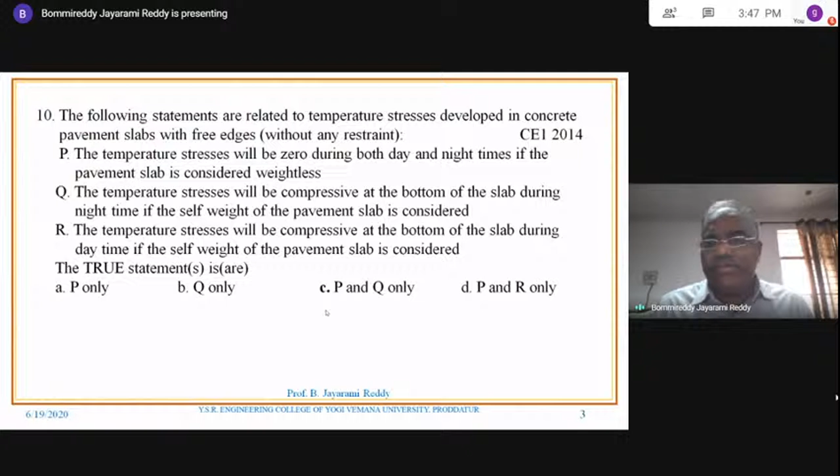Now let us look at the various statements given. The first statement is P: the temperature stresses will be zero during both day and night times if the pavement slab is considered weightless.

So now whether that statement is correct or not, we have to look, because without any restraint the slab is going to move. So there are no warping stresses. Warping stresses come into picture only when there is a restraint. But here restraint is not there, so warping stresses are zero.

So the other stresses are frictional stresses. As seen in the last class discussion, frictional stress means W multiplied by F, weight of the half of the slab multiplied by F, will be equal to stress in the concrete multiplied by area of the concrete. Area of the concrete is B into H. This is the equation that you have seen.

But when the slab is weightless, W equals 0. When there is no weight of the slab considered, there is no frictional resistance. When there is no frictional resistance, then temperature stress is also 0. So the statement P is correct.

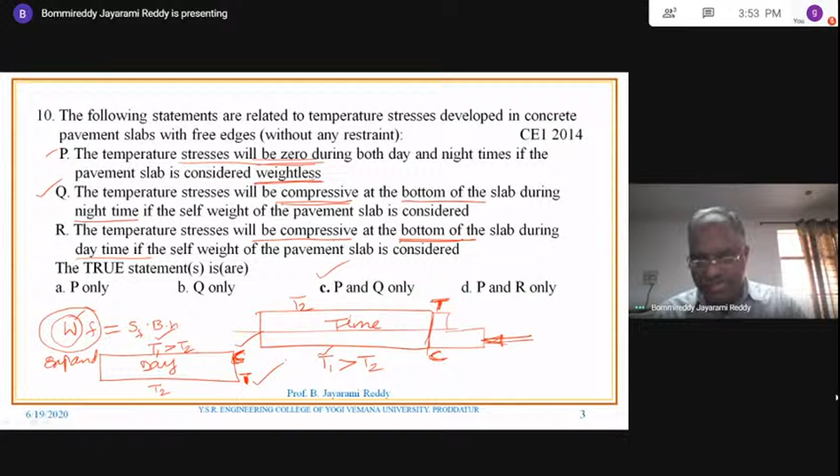Okay, this is the explanation, you can look at it later in detail. The detailed discussion is also given for statement P, statement Q, and also R, which you can see later. So already I told you for P, what is going to happen - warping stresses are zero because there is no restraint. You can look at whatever discussion covers these concepts.

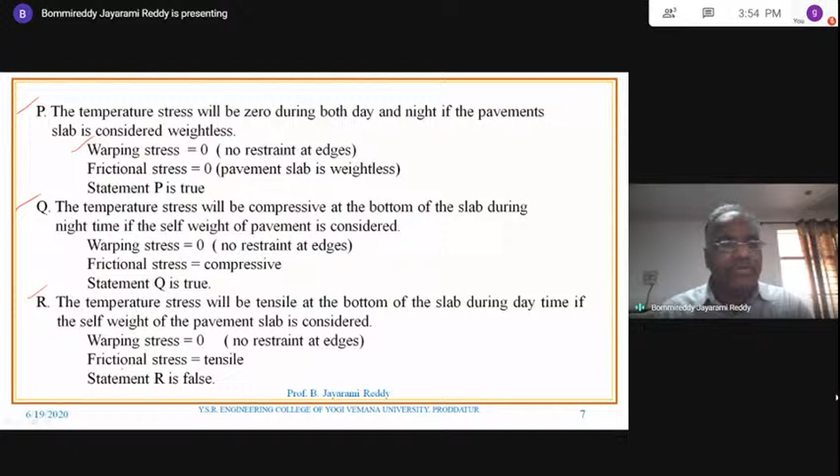The next one: a pavement designer has arrived at a design traffic of 100 million standard axles, so NS equals 100 MSA, for a newly developing national highway, as per IRC 37 guidelines, using the following data: design life 15 years, so N equals 15 years, commercial vehicle count before pavement construction is 4,500, meaning at the time of construction it is 4,500, annual traffic growth rate 8% given. The question asks what is the vehicle damage factor F value?

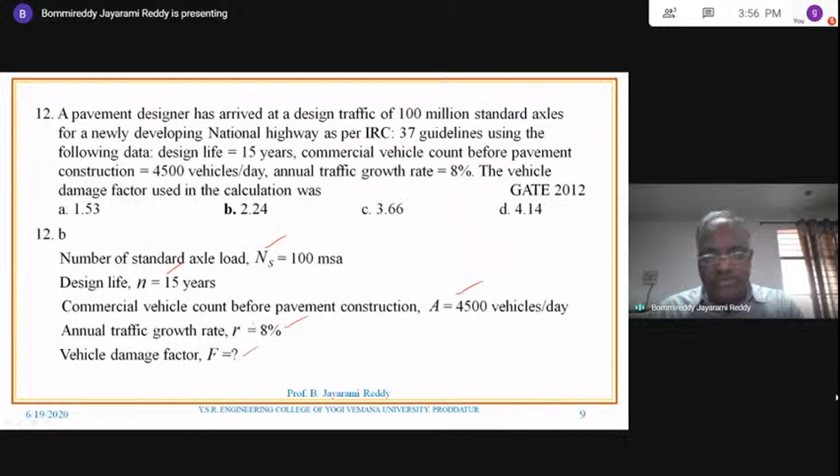Based on this, we have a relation for NS: NS equals 365 times A times ((1+R) to the power N, minus 1), divided by R, into F, also multiplied by D. Lane distribution factor is not given, so consider D as 1. In this, NS is known, A is known, R is known, only F is the unknown value that can be found, which equals 2.24.

While observing and reading all these problems, they may look simple, but if you don't have practice computing the F value, it's very difficult in the examination. You may need to spend a lot of time, or though you know the formula, you may struggle to substitute it correctly - it involves 1 plus 0.08 to the power 15, which is 1.08 to the power 15. If you have knowledge of computing this using a calculator, only then can you solve this problem. Majority of students will fail at this calculation stage too, so practicing to get this solution is more important.

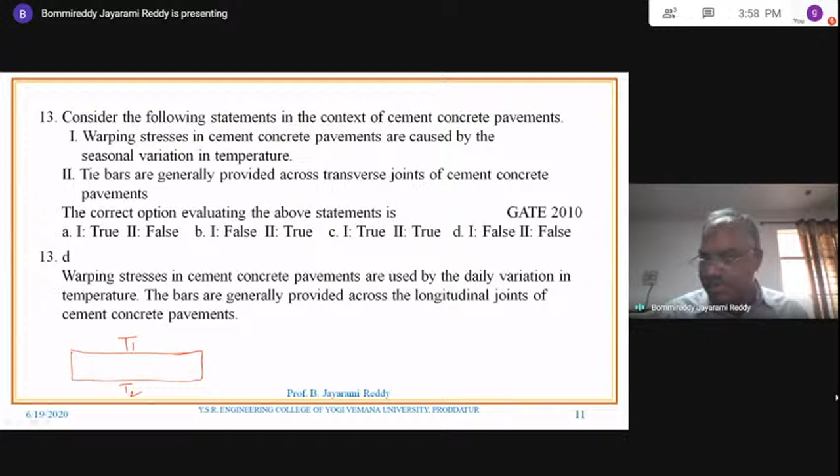Next one: consider the following statements in the context of cement concrete pavements. Warping stresses in cement concrete pavements are caused by the seasonal variation in temperature. How do warping stresses occur? Warping stresses occur because of the variation of temperature from top to bottom, and because of this variation, warping stresses occur. It is not varying seasonally - the warping of the slab occurs only because of the change in temperature across the cross section.

So statement 1 is false. Read it: warping stresses in cement concrete pavements are caused by the daily variation in temperature - daily variation only, and variation across the cross section.

Next, number 2: tie bars are generally provided across transverse joints of cement concrete pavements. Where do you use tie bars? Tie bars are used along the longitudinal joint, not the transverse joint - this is called the tie bar. So the tie bars are used along the longitudinal joint, but not the transverse joint. In the transverse direction, the reinforcement used is called dowel bars. Dowel bars are in the transverse direction, whereas tie bars are in the longitudinal direction.

So statement 2 is also false. The answer is D - statement 1 false, statement 2 also false. For answering all these questions, overall subject conceptual knowledge is more important, not remembering certain simple points.

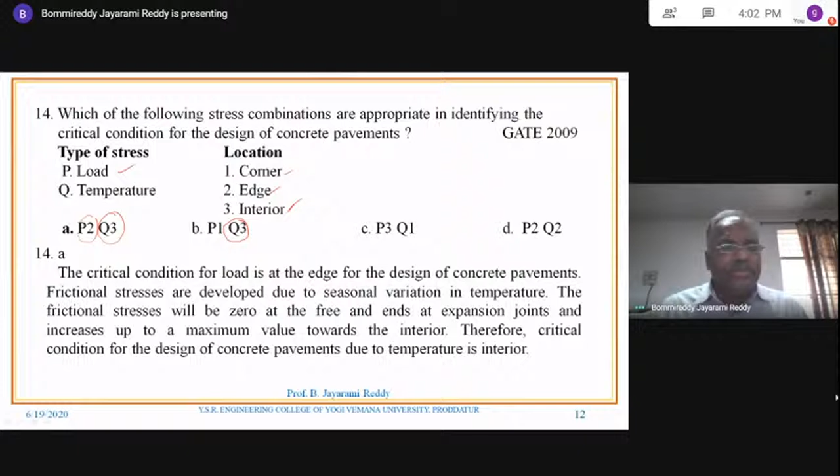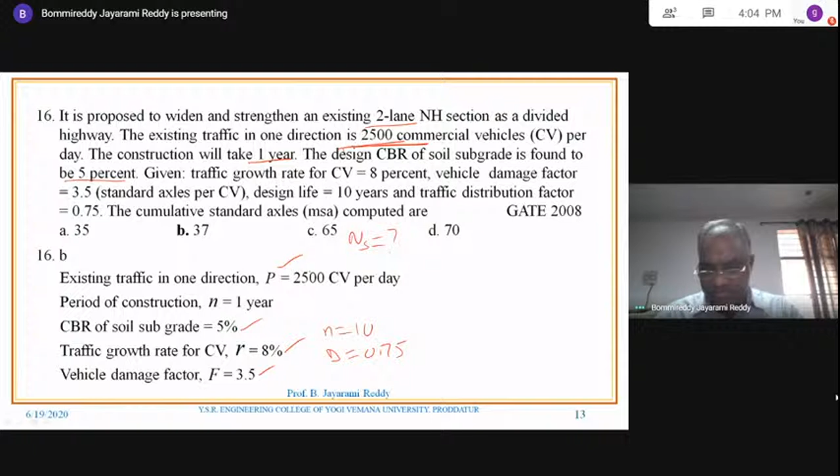The question asks for cumulative standard axles computed, NS. Since it is in only one direction, compute the NS value also in the same direction. So using all this given information, find out the anticipated traffic.

Anticipated traffic after 1 year: A equals P into (1 plus R) to the power 1. Here N value equals 1 year since construction will take 1 year. So accordingly, A equals 2700.

Basing on this, cumulative standard axles NS equals the known formula. Since it is only in one direction, you can omit the factor of 2 which represents both directions. But since the question is given in one direction and asks for cumulative standard axles in one direction, you can either calculate using 2 and later divide by 2, or omit the 2 altogether and the value obtained will be correct directly. Substituting all values accordingly, you will get the answer.

You get 74.94 for both directions. For one direction, take half of it. If you don't use the factor of 2, you get 37.47 directly. Otherwise, use 2 and then find per lane value - it comes to 37.47. This is a standard question; several questions of this type have appeared so far.

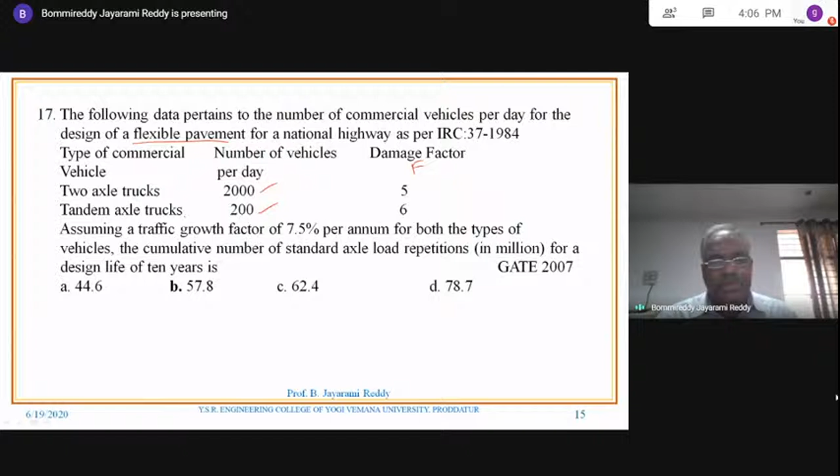The damage factor F and number of vehicles per day are given. 2-axle trucks are 2000 per day, tandem axle trucks are 200 per day. Tandem axles means 2 axles very close together at the rear side of the vehicle - that is called the tandem axle. Assuming traffic growth rate R equals 7.5% per annum for both types of vehicles, for both 2-axle trucks and tandem axle trucks.

The cumulative number of standard axle load repetitions for a design period of 10 years is required, so N is 10 years. What you need to do here is find the NS value: NS1 for 2-axle trucks and NS2 for the tandem axle trucks.

Because damage factor is different, vehicle number is also different, but rate of growth is same and design life is also same. So what you do is find out NS1 separately for 2-axle trucks, NS2 separately for tandem axle trucks, so that the total value becomes the standard number of repetitions for the highway.

So what you do, this is the standard formula that you know, and the lane distribution factor is not given. You can use D equal to 1 multiplied by D.

And this is the entire information. Now, for the first case, A equal to 2000 vehicles and all these parameters are same, and find out NS1, which is 51.6 MSA.

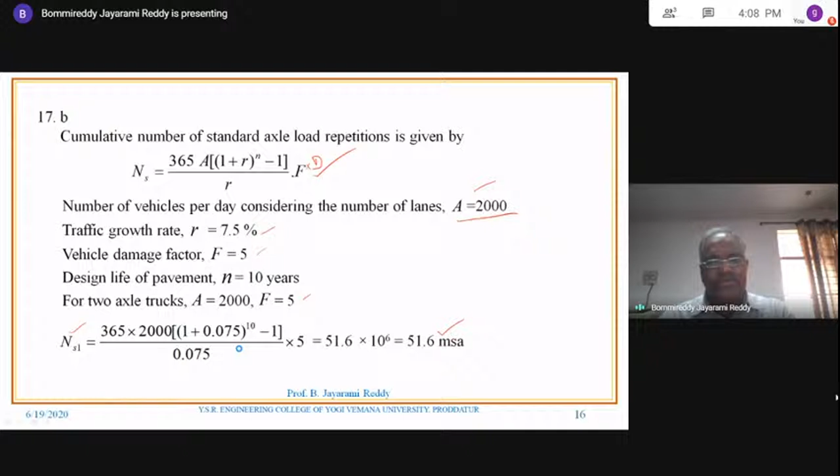200 and damage factor is 6. Accordingly substitute, and it will be 6.2 MSA. So NS1 plus NS2 becomes equal to 57.8.

So here two different types of vehicles are there, two different types of axles. So we are computing the standard axles for axle 1 and also for the axle 2 type of vehicles.

Next one: the width of the expansion joint is 20 mm in a cement concrete pavement. That means that is the gap between the slab panels in cement concrete, the gap between the cement panels. So this is one panel and it is another panel. The gap in between these two becomes equal to 20 millimeters.

The laying temperature is 20 degrees centigrade, so at the time of laying it is 20 degrees. And the maximum temperature in summer is 60. So that means the temperature is varying from T1 to T2.

The coefficient of thermal expansion of the concrete is 10 into 10 power minus 6, alpha is given. And the joint filler compresses up to 50% of the thickness.

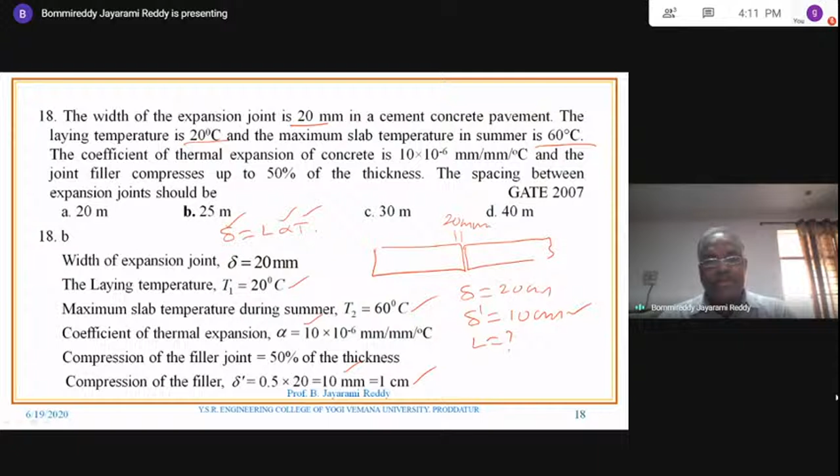And delta is known, alpha is known, temperature difference is known, that is 60 minus 20, and L is the spacing between the expansion joints. You can look at here, L into alpha into T equal to delta.

So delta is 10 mm, L alpha T, and from this, 25 into 10 power 3 mm, so it is 25 meters. So the gap between the slab panels is now 25 meters. The distance between the expansion joints is 25 meters.

Don't try to remember any of the formula. This is also the same, it is nothing but delta equal to L alpha into T only. Everything is same. Just use it as simple as possible without much complication. So do not remember any of the formula for any computation of it.

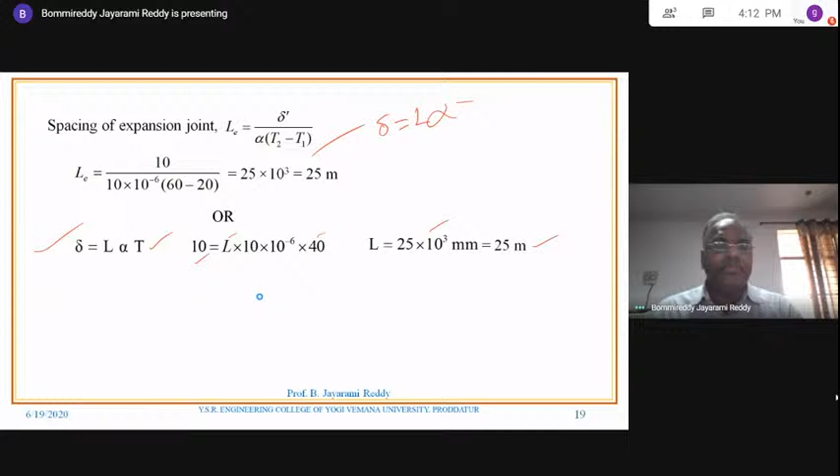Next question. Using IRC 37/1984 guidelines for the design of flexible pavements and the following data, choose the total thickness of the pavement. So the question here is, what is the thickness of the pavement? That is the question. The data is number of commercial vehicles when construction is completed.

This is nothing but A, capital A given. Annual rate of growth of traffic is 5%. Design life of pavement N is 10 years. Vehicle damage factor F is given. Then CBR is 5%.

And data for 5% CBR value: number of standard axles 20, 25, 30, 40, correspondingly 620, 640, 670, 700 mm is the thickness. So here the entire data is given, that's why the question looks very big.

So when the table like this is given, what is the question? Question is what is the thickness? In the table you can look at the total thickness term. How do you get this thickness? How do you get this thickness?

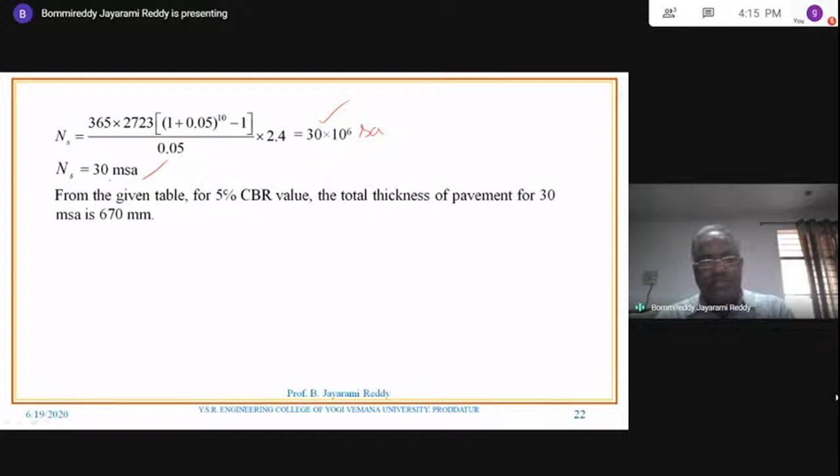This is the formula and entire data. If you substitute all the values, you will get 30 into 10 power 6 standard axles. That we can call it 30 MSA. When it is 30 MSA, it is there in the table. What is the thickness? What is your answer? Your answer will be 670 millimeters. That is this 670 mm.

So for that purpose, this table is given, because the design of flexible pavement by CBR method is based on the number of cumulative standard axles, and accordingly we can compute the thickness of the pavement by the use of curve or graph. But here instead of graph, it has given the values directly, and first compute the NS value, which is 30. Associated thickness will be 670, so 670 is the answer for it.

Remember one thing, when the question is big, composed of diagrams, tables, etc., your clear-cut observation is more important. If the observation is clear, the solution will be there 50% in it.

Next question. In case of governing equations for calculating wheel load stresses using Westergaard's approach, the following statements are given. Westergaard's approach is used in case of wheel load stresses in rigid pavements.

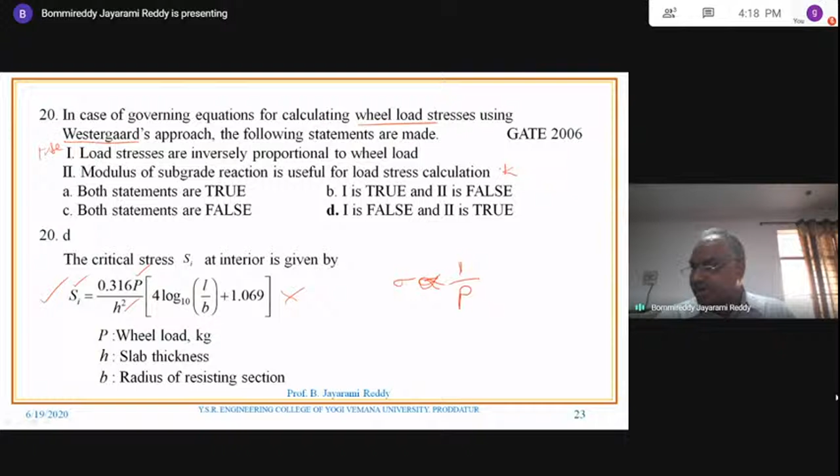What is the second statement? Modulus of subgrade reaction is useful for load stress calculation. What is modulus of subgrade reaction? K. That K will be used for computing SI, the stress. Is it correct or not?

So what is K, the modulus of subgrade reaction? L will be equal to EH cubed by 12 into 1 minus mu square, divided by K, whole to the power of 1 by 4. This is called the radius of relative stiffness. In the radius of relative stiffness, the K term is involved, so modulus of subgrade reaction affects L. This L is there in the SI equation, the stress computation.

This L is called the radius of relative stiffness. That means the SI stress at the interior, or load stress, depends on the radius of relative stiffness, which in turn depends on the K value. So the statement, modulus of subgrade reaction is useful for load stress calculation, is correct. So statement 1 is false and statement 2 is true.

So here the statements are like this. If you read the information 100 times, you may not get your answer. Only by understanding the full concept of the knowledge can you answer all these questions.

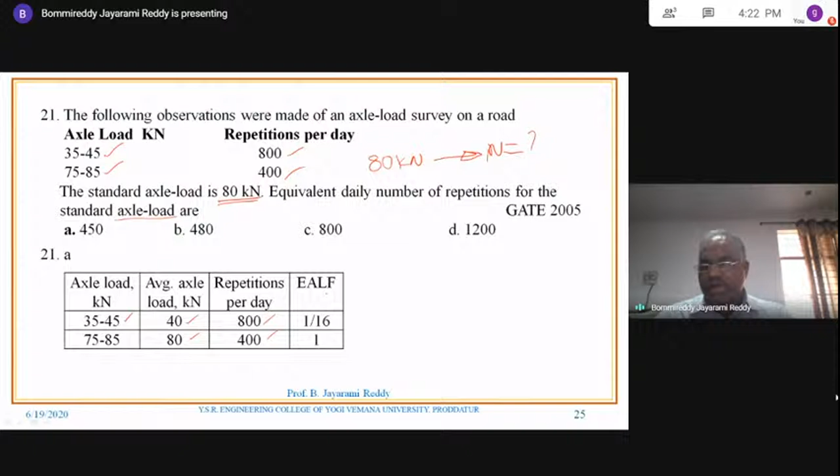So that means the entire repetitions should be converted into the equivalent value of 80 kilonewton axial load, and find out the number of repetitions. As discussed earlier, the average axial load is 35 plus 45 by 2, and 75 plus 85 by 2 is 80, with repetitions per day 800 and 400 given, along with EALF, the equivalent axial load factor.

EALF is equal to W by W standard, whole to the power of 4. For the first one, it is 40 by 80 whole to the power of 4, which means 1 by 2 whole to the power of 4, that is 1 by 16. Similarly, for 80 kilonewton load, since the load and standard load are both 80, power 4 gives exactly 1, because both are the same.

So what is the equivalent number of standard load repetitions? That means one repetition of 35 to 45 is equal to 1 by 16th of it.

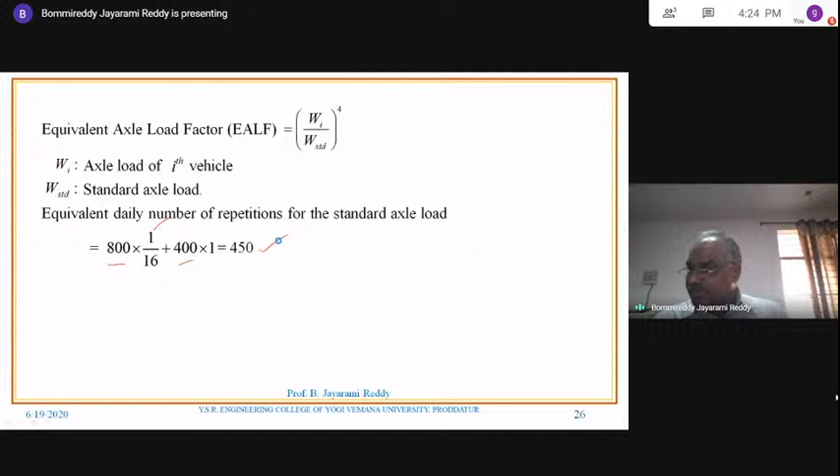800 passes are there, multiplied by its equivalency factor 1 by 16. 400 passes are there, multiplied by its equivalent value 1. So that gives 450 as the equivalent repetitions for 80 kilonewton stresses.

Analysis of stresses gives the following values. What are the various stresses? One is wheel load stress, these are called the wheel load stresses. Another type is warping stresses, and one more type is frictional stresses. So different types of stresses induced in concrete pavement, with numerical values, are given.

So what you have to do is find the most critical stress, the worst stress, the highest magnitude of stress. What is the data? Wheel load stress due to corner loading means whenever you want to compute stress at the corner, you consider 30. Wheel load stress due to edge loading at the edge is 32.

There is no interior load given, so one is edge, another is corner. Warping stresses at the corner are given during summer and winter. Warping stress is also given for edge summer and edge winter. Then frictional stresses: first one is during summer, and during winter it is 4. These are the values given.

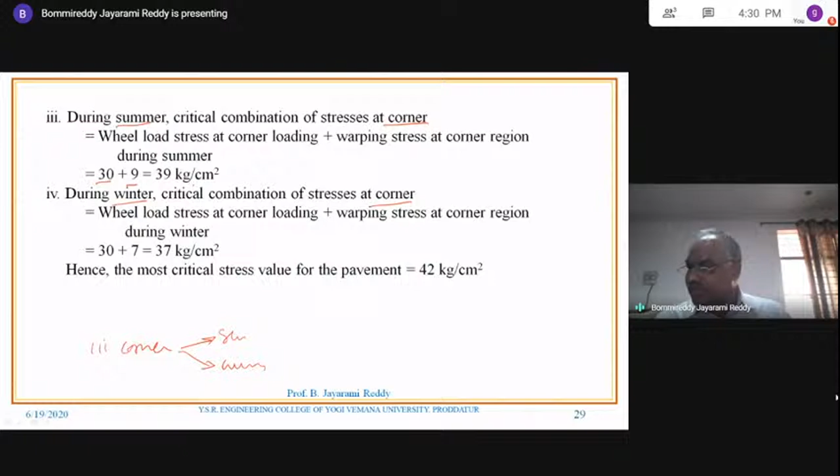So what is the corner stress? Corner stress is load stress plus warping stress only, and that too it is summer. So you have to take this 30, and also warping stress at corner in summer is 9. So that is 30 plus 9, which is equal to 39. And corner in winter it is 30, the load stress, and in winter the warping is 7. So 30 plus 7 is 37. So this is the third case.

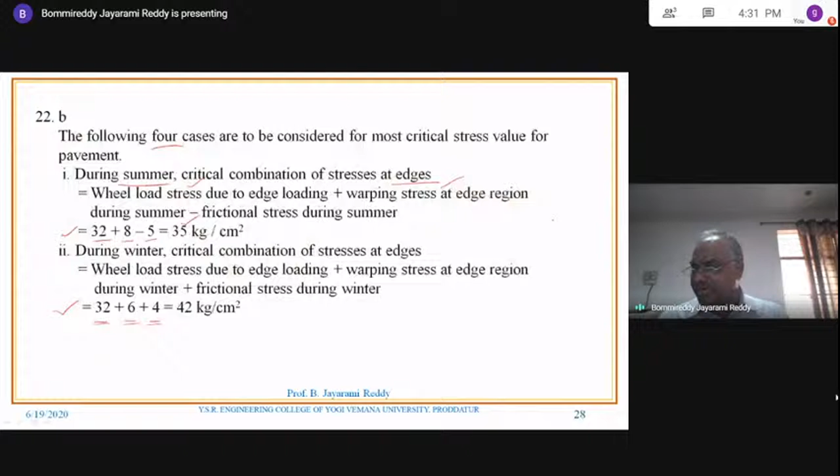In the third case, you can have A and also B, and by observation the first value is fixed. Only the second value varies, and whichever is more, that will be taken as the combination of the worst case. So second one is 37. You can look here, one is 39, another one 37. Out of all these, 37, 39, 35, 42. So what is critical? Critical stress will become 42 kg per cm square, and that will be the appropriate value.

So here the data may be anything, but as per your requirement, you have to see what is statement 1, what is statement 2, and what is statement 3. These are the only 3 critical combinations that occur.

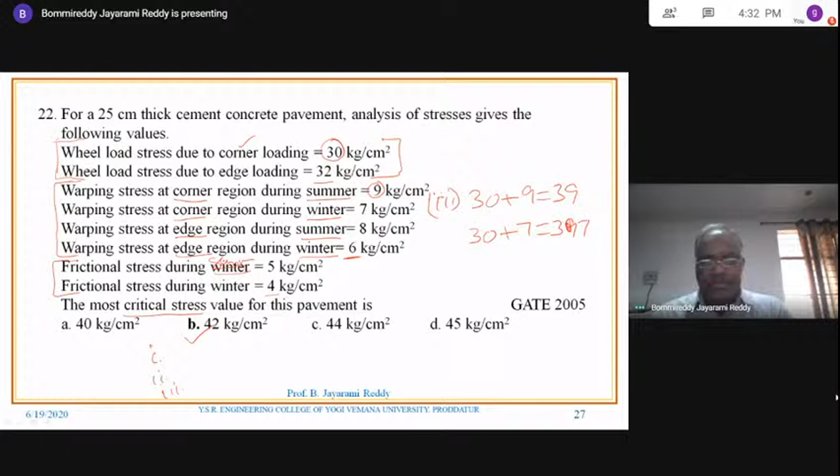Next one. The data given below pertains to design of a flexible pavement. Initial traffic 1213 CVPD. Traffic growth rate 8%. Design life 12 years. Vehicle damage factor 2.5. Distribution factor 1. The design traffic in terms of million standard axles to be catered would be.

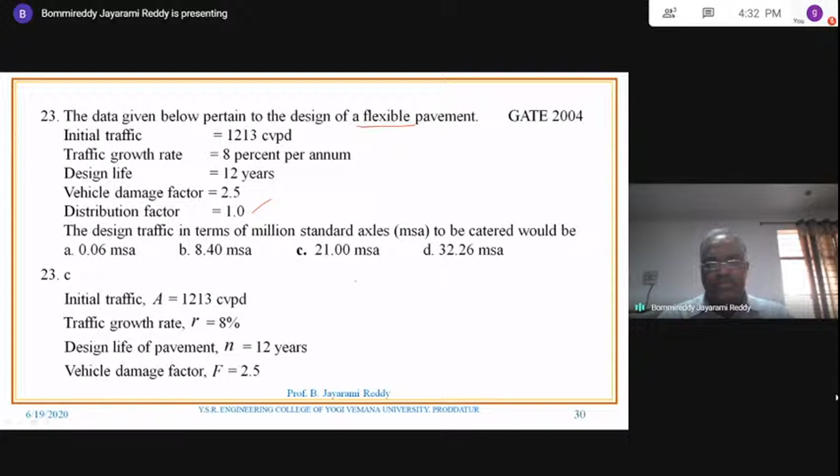So with just substitution of various values, nothing is special here. This is the formula, substitute everything, you will get the appropriate value. No much discussion is required.

Next one. In the context of flexible pavement design, the ratio of contact pressure to tire pressure is called rigidity factor. Rigidity factor is nothing but contact pressure by tire pressure. This factor is less than unity when the tire pressure is... So already you know that tire pressure is less than 7 kg per cm square.

What is going to happen? Contact pressure is more than tire pressure, or otherwise you can write tire pressure is less than 7 means tire pressure is less than contact pressure. Okay, anyway, here it is there. So average tire pressure equal to exactly 7, rigidity factor is 1. Tire pressure less than 7, so tire pressure is less than the contact pressure. Tire pressure more than 7, then tire pressure will be more than contact pressure. Accordingly, you have to answer this particular question.

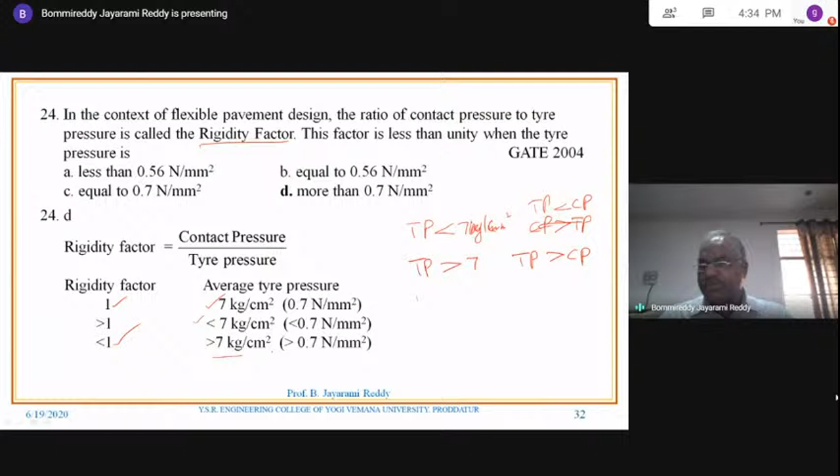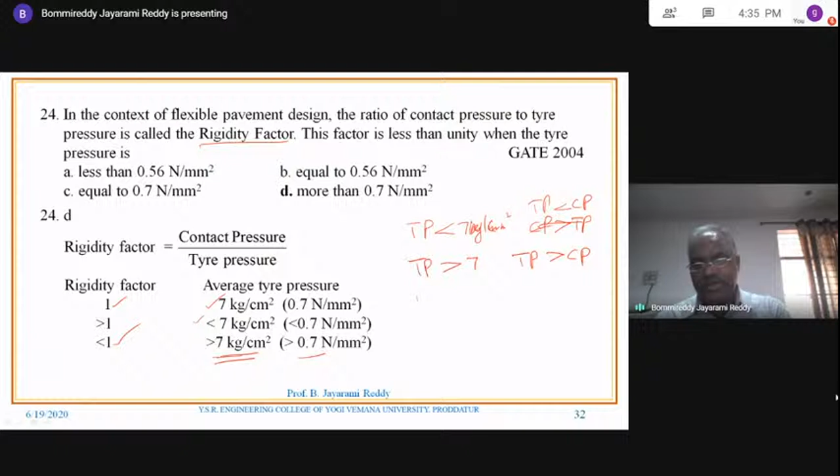So what is going to happen? This factor is less than unity when it is more than 7 kg per cm square, or otherwise 0.7 Newton per mm square. So now, as we have studied already, 7 kg per cm square can be written as 0.7 Newton per millimeter square, and the associated diagram is already there in the study of the theory.

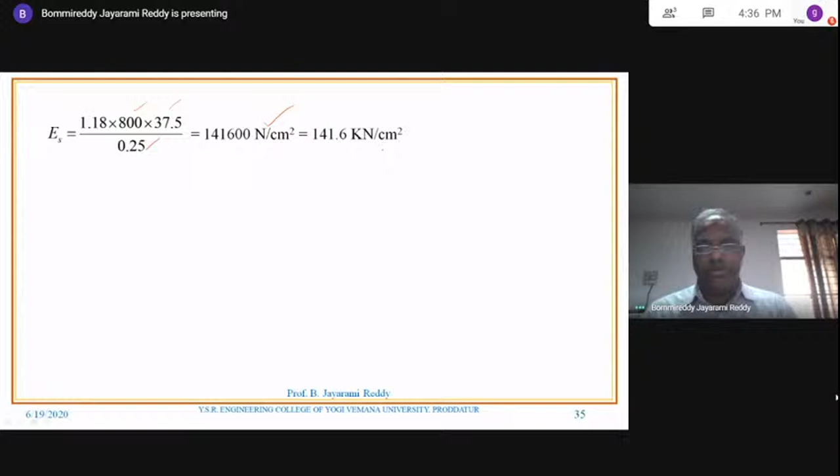The answer is in kilonewton per centimeter square. Accordingly, convert it. So the answer is the modulus of elasticity of the subgrade soil in kilonewton per centimeter square. So whatever value you got from your calculation, convert it into kilonewton per cm square ultimately, and that will be 141.6.

Next. Temperature stresses in concrete pavements may cause the slab to crack. So whenever the stresses are more than the critical limit, then naturally the slab gets cracked. If a slab cools uniformly, then the crack will develop at the following locations.

So here what is going to happen, there is one slab, this slab is going to cool uniformly, temperature is continuously decreasing. Then where do you get the crack?

Warping stresses and frictional stresses will develop. But here what is going to happen? If a slab cools uniformly, here it is given uniformly means from top to bottom, from one edge to the other edge. At all edges, it cools uniformly. Whenever it cools uniformly, there is no warping induced.

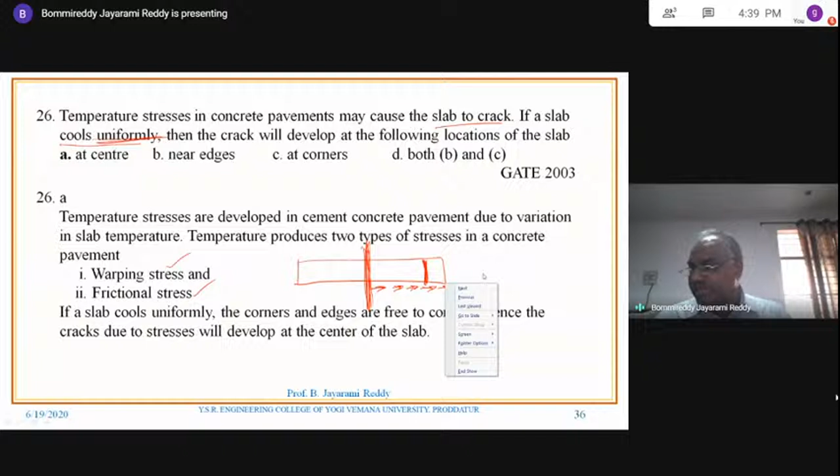So these frictional stresses are almost zero at the corner, and at the edge it is very small. And as it is moving towards here, this is the maximum.

Similarly, in this direction also, what is going to happen? The slab is going to reduce its length. In the process of it, the tensile stresses will induce. So that means about the center, on one side tensile stresses, other side also tensile stresses. So the middle part of the section is under tension. When the middle part is under tension, maximum stress induced at the center. So if a crack is induced, that will develop at the center of the pavement section.

In a concrete pavement, temperature stress is tensile at the bottom during daytime. During daytime, temperature stress is tensile at the bottom.

Another statement is, load stress is compressive at bottom. So what is going to happen when the load is acting? It is going to take the shape like this. Because of the load acting, the top is under compression, the bottom is under tension.

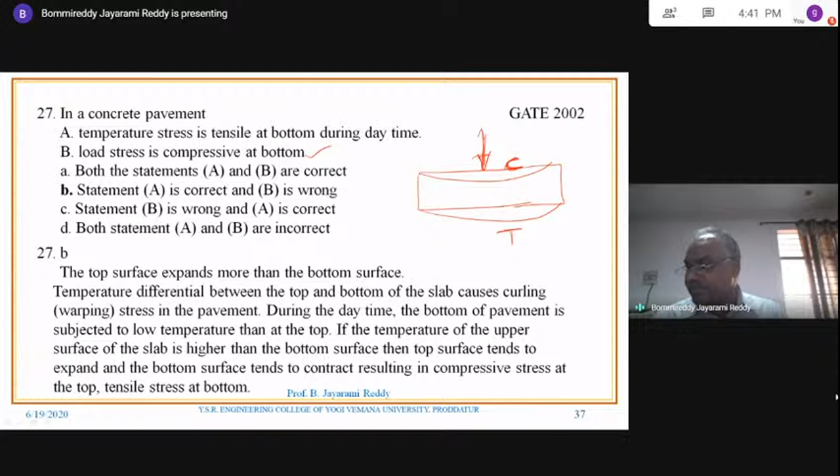What is statement 2? Load stress is compressive at bottom. No, load stress is tensile at the bottom.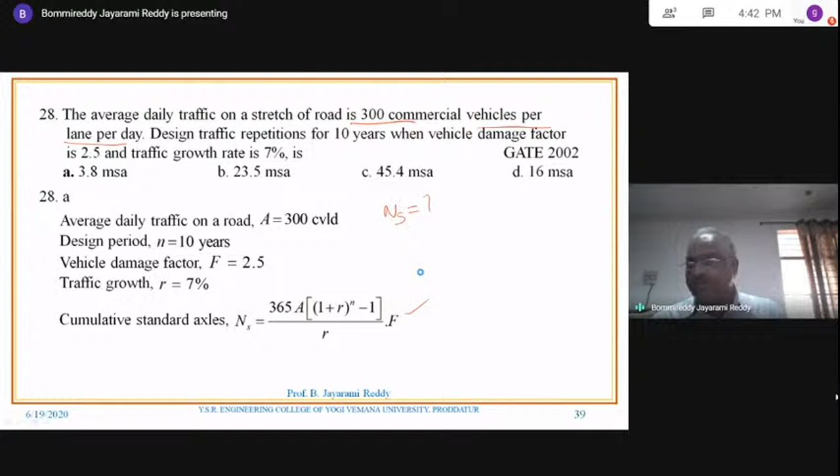Then, dowel bars in concrete pavement are placed where? This is the concrete pavement along the length, and this is the transverse joint. Dowel bars will be provided here, across the transverse section. So across the transverse section, how can it be represented? Dowel bars can be placed across the transverse section, this is one answer.

Across the transverse section, and this is in the direction of traffic. Traffic is in this direction, so we can consider it as along the direction of traffic. The bar length is placed in the direction of traffic, or otherwise it will be provided across the transverse section. Perpendicular to the direction of traffic? No, perpendicular to the direction of traffic means like this. So these are the tie bars that are provided. Tie bars are always perpendicular to the direction of traffic. And along 45 degrees, no. Can they be placed in any direction? No, it is along the direction of traffic.

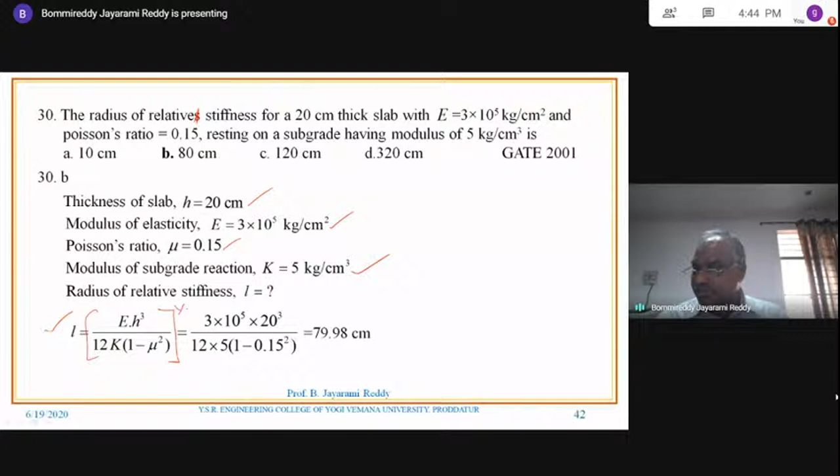It is whole power 1 by 4: EH cubed by 12k into 1 minus mu square, whole power 1 by 4, and you will get 79.98 centimeter as the radius of relative stiffness.

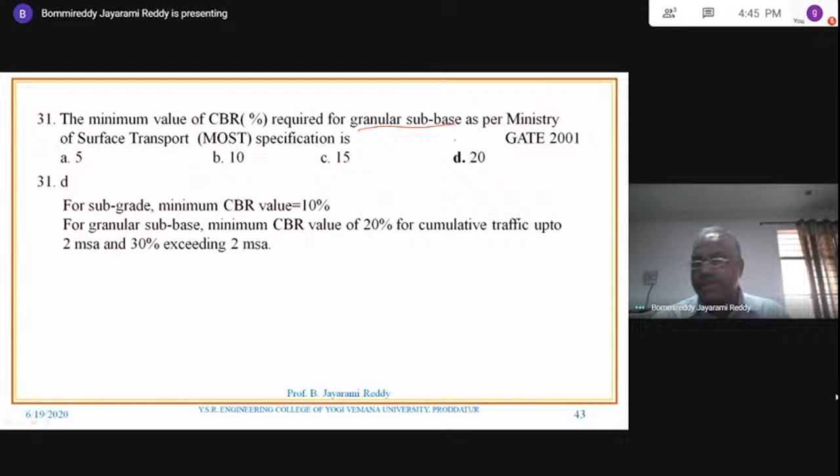It is CBR that we will see. The minimum value of CBR required for GSB, granular subbase, as per MOST Ministry of Surface Transport specification is 20. So minimum value is 20, that you need to remember.

Then the standard size of plate bearing test for finding modulus of subgrade reaction: for finding the modulus of subgrade reaction, we are using a 75 centimeter diameter plate.

A two-lane single carriageway - single carriageway means no divider, that's the meaning. So two-way, we can call it as two-way. Two-lane single carriage means two-lane two-way, is to be designed for a design life period of 15 years. N is 15.

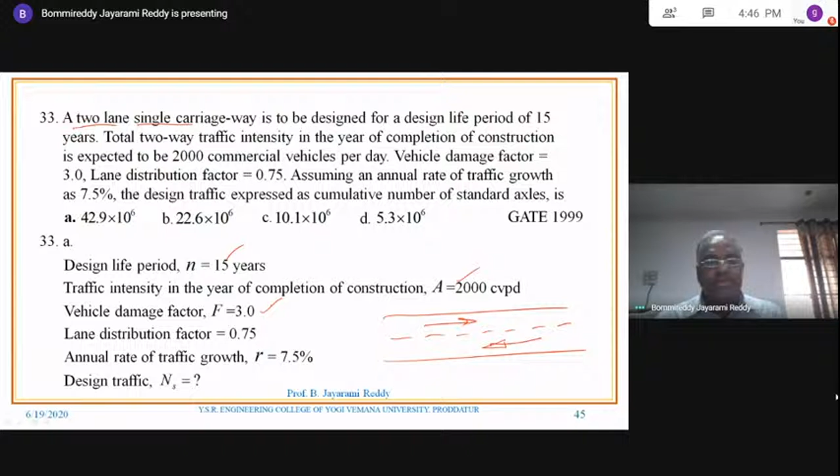The total two-way traffic intensity in the year of completion of construction is expected to be 2000 commercial vehicles per day, that is A. Vehicle damage factor 3, lane distribution factor 0.75. Assuming an annual traffic growth as 7.5%, the design traffic expressed as cumulative number of standard axles is a routine problem - it means million standard axles.

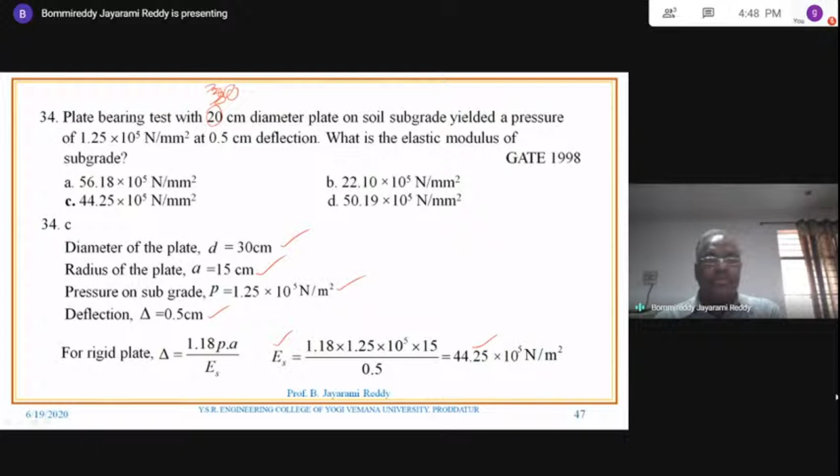What is the equivalent single wheel load? Equivalent single wheel load, that means ESWL. What is the equivalent single wheel load of a dual wheel assembly carrying 20,440 newtons each? So there are two tires, each one is P, this is P and it is also P, each is acting 20,440 newtons. It is also 20,440 newtons and the two are very close to each other - dual wheel assembly.

Pavement thickness is 20 centimeters, so thickness is given. Then center to center spacing of tires is 27 centimeters, S is given. And the distance between the walls of the tires - walls of the tires means the clear distance - D is given as 11 centimeters. So what is the equivalent single wheel load? That's the problem.

Now what you do? There are important points at D by 2. At D by 2, the equivalent single wheel load will be equal to P, that is up to D by 2. And another one is beyond 2S. Beyond 2S, the corresponding ESWL becomes equal to 2P. And in between these two, interpolate the value. That is the original thing that you have seen.

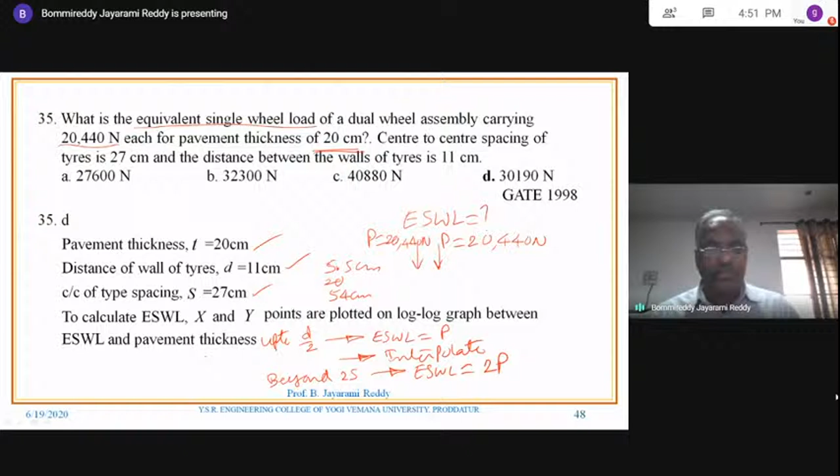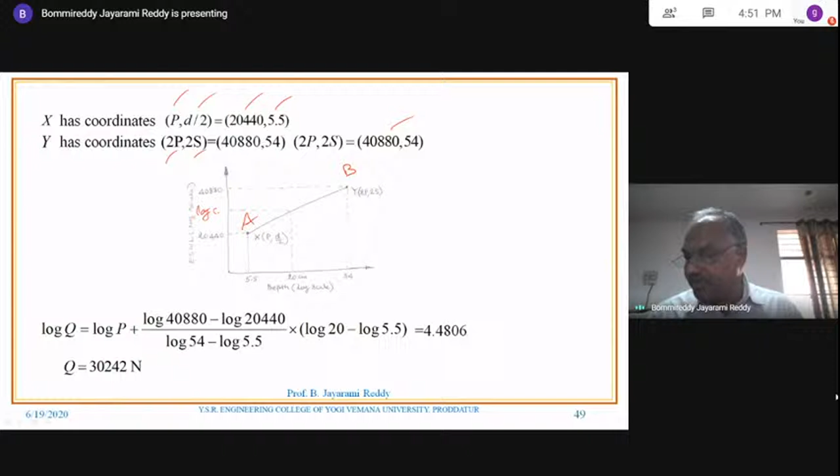In the interpolation, what you do? For 20 centimeters you need to find this out. So it is nothing but log of Q, that Q is nothing but ESWL. So log Q equals - you have to find the starting value. What is that starting value? Log of P, or log of 20440, plus the vertical difference of the two. What is the vertical difference? Log of 40,880 minus log of P, divided by log of 2S minus log of D by 2, into the difference between these two: log of 20 minus log of 5.5. You will get this - so here log Q equals something.

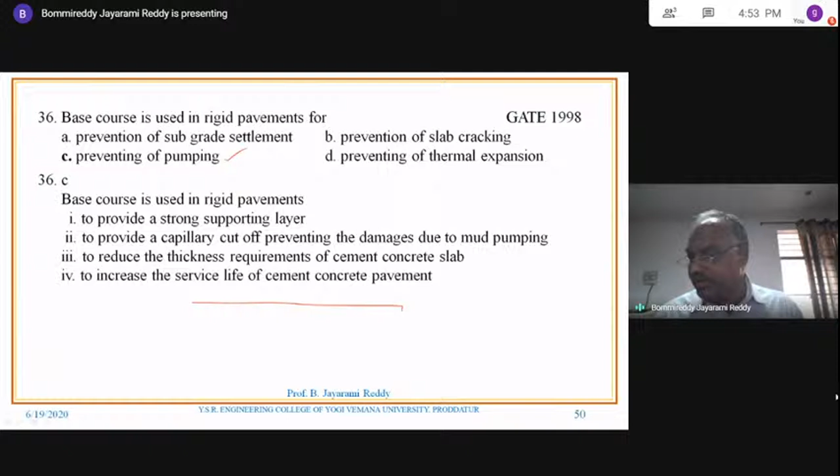Base course is used in the rigid pavement for. Why is base course used? Mainly several things are there - one is preventing pumping. That means what is going to happen for the rigid pavement? This is the rigid pavement, the base course is required. Base course means - it is PCC, and then the original concrete. Below this is the base course, and below this is the subbase.

So the main purpose of PCC - if there is no PCC and the concrete is laid directly on the soil, what is going to happen? Because of accumulated water at the bottom, there will be pressure and pumping of mud will take place. Mud will penetrate into the concrete and come up. Because of that reason, we need PCC below it - to provide a strong support layer and capillary cutoff preventing the damage of mud pumping. Otherwise, small pores will be there in the concrete and mud will come up through the pores.

Other reasons include reducing the thickness of the required cement concrete slab and increasing the service life. Out of these, option C is correct - to prevent mud pumping. Subgrade settlement does not depend on it, prevention of slab cracking is no, and preventing thermal expansion is no. So mud pumping prevention is the main reason, with several other reasons also given with clear explanation.

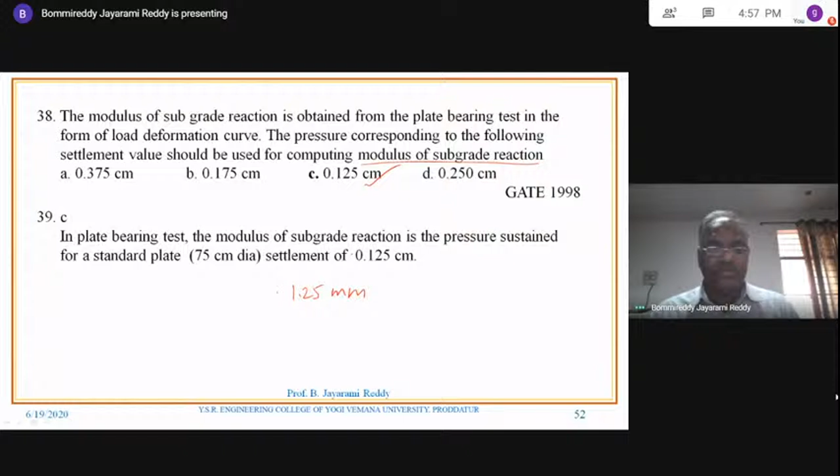The width of the expansion gap delta is given as 2.5 centimeters in a cement concrete pavement. Find the spacing between expansion joints for a maximum rise of temperature T of 25 degrees centigrade, assuming the coefficient of thermal expansion alpha is given per degree centigrade. We assume that 50% of the mastic pad is going to compress, so the allowable deformation is only delta by 2, that is 1.25 centimeters. Using the formula delta dash equals L alpha T, substitute everything to get L equal to 50 meters.

The total thickness of pavement by CBR method depends on the CBR value of all layers - surface course, base course, and subgrade - because CBR for the top layer may be more, but it also requires CBR for the lower layers. The total thickness depends on CBR values of all the different types of layers in the cross section.

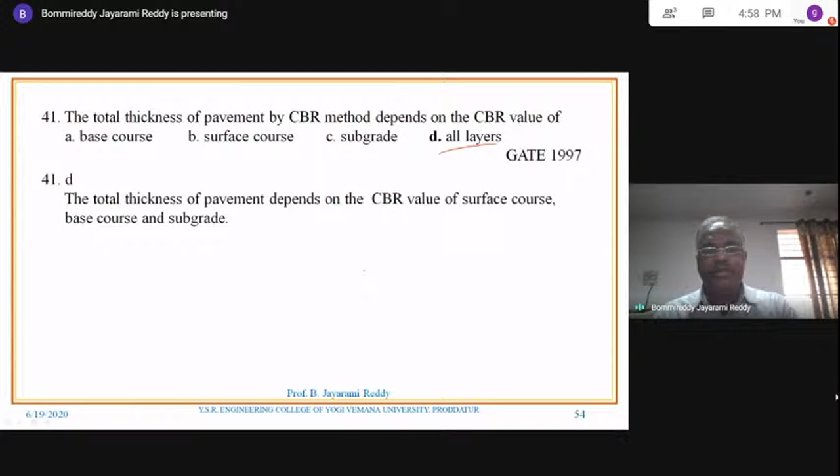Group index of a soil is 7, and the subgrade soil is rated accordingly. As given in the previous class's table, the minimum group index value is 0 and maximum is 20, with ranges like 0 to 1, 2 to 4, etc. The more the group index value, the poorer the material; the less the group index, the better the material. Accordingly, the ratings are poor, very poor, good, and fair.

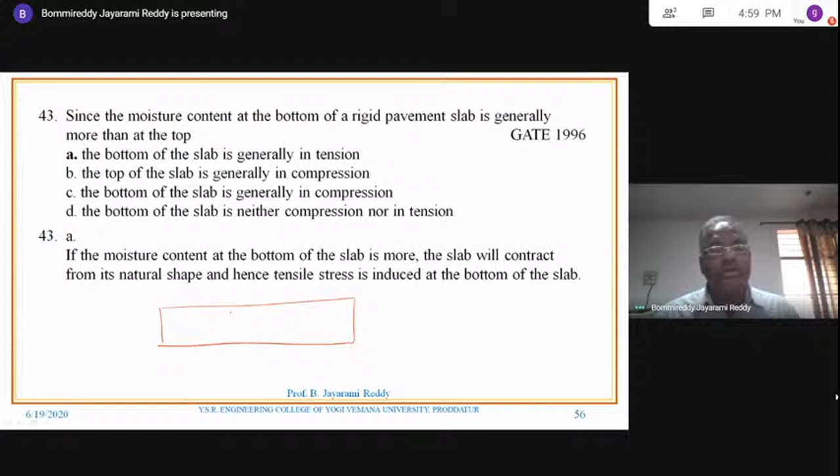Since the moisture content at the bottom of a rigid pavement slab is generally more than at the top, what happens here? The bottom of the slab is generally in tension - though it is general, we should not say always tension. Generally it is tension because, due to the wheel load, the slab deflects such that the bottom is under tension and the top is under compression.

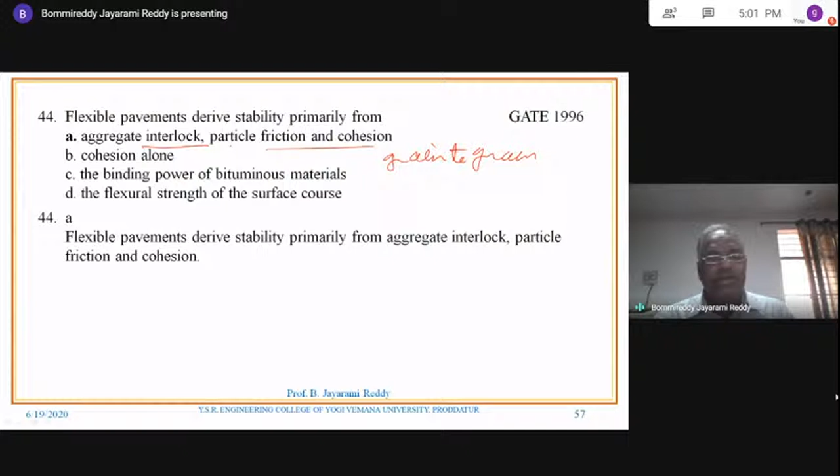Flexible pavements derive stability primarily by means of interlocking and by developing friction and cohesion. The load transfer is by means of grain to grain distribution, so friction and cohesion affect it, and aggregate interlocking also has a predominant role.

Then of course 1.25 mm. It's a routine question already you have seen. For modulus of subgrade reaction, the settlement to be used is 1.25 mm.

Then a plate bearing test was carried out on subgrade using 76 centimeters diameter rigid plate. The deflection of 1.25 mm was caused at a pressure of 0.84 kg per cm square. The modulus of subgrade reaction is based on the 75 centimeter diameter plate with 1.25 mm deflection. The pressure is called K. But here the plate is 76 centimeter.

So what you do first with d1, delta, p, find out K equal to P by delta. That is 0.84 by 0.125 as per the given values. And this is the modulus of subgrade reaction, for the 76 centimeter diameter plate.

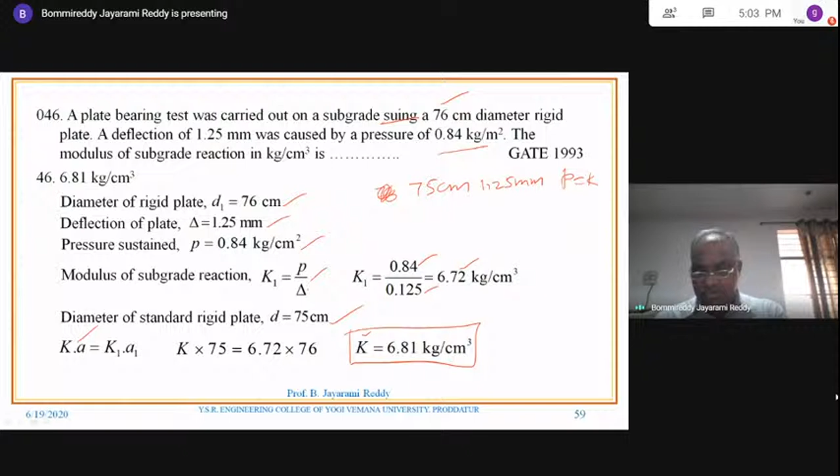But what is the standard value? Standard value is 75 centimeter. And you know the relation Ka equal to K1A1, substitute here, and you will get the final, correct modulus of subgrade reaction. So here we are correcting for the diameter of the plate in this particular problem.

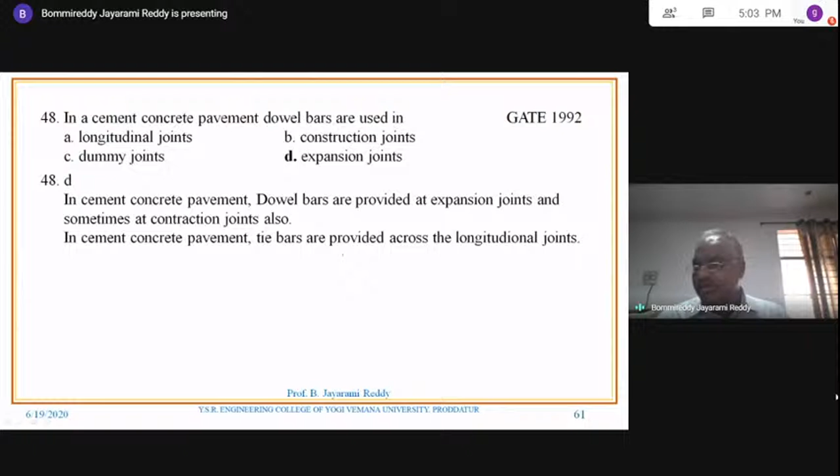The load transfer to lower layers in flexible pavement is by means of grain to grain contact in case of flexible pavement. The modulus of subgrade reaction is evaluated from...

So which of the following tests will be used for modulus of subgrade reaction? Sometimes you may feel that all these tests are known but still be unable to answer it. In such a case, modulus of subgrade reaction means there is a plate and some pressure will be exerted on it, so that the deflection equals 1.25 millimeters, and naturally that is possible in case of plate bearing test.

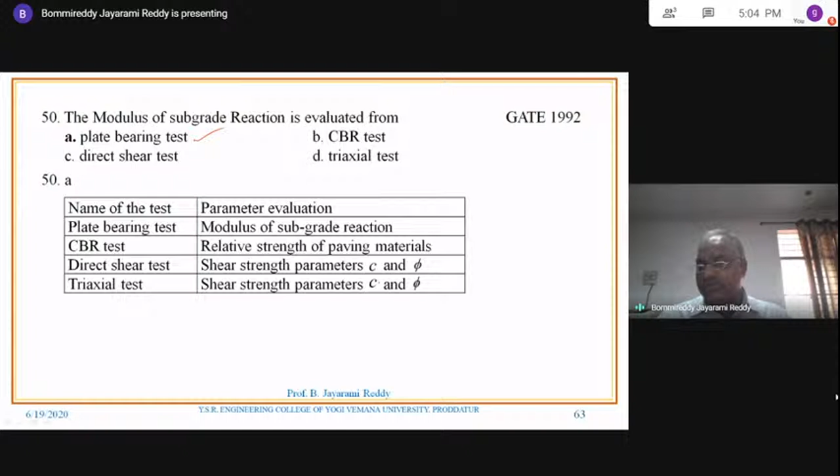These are the various tests used for different purposes. Plate bearing test is for modulus of subgrade reaction. CBR test is for the relative strength of the pavement material. Direct shear test is for finding C and phi parameters. Triaxial test is also used for C and phi parameters. So you have to observe each and every one, otherwise you may not answer the questions that come later.

Next, the position of the base course in a flexible pavement. Sometimes such a simple question will be there. You can see here soil subgrade, then sub-base course, and surface course, and where it is lying. It is above the sub-base course.

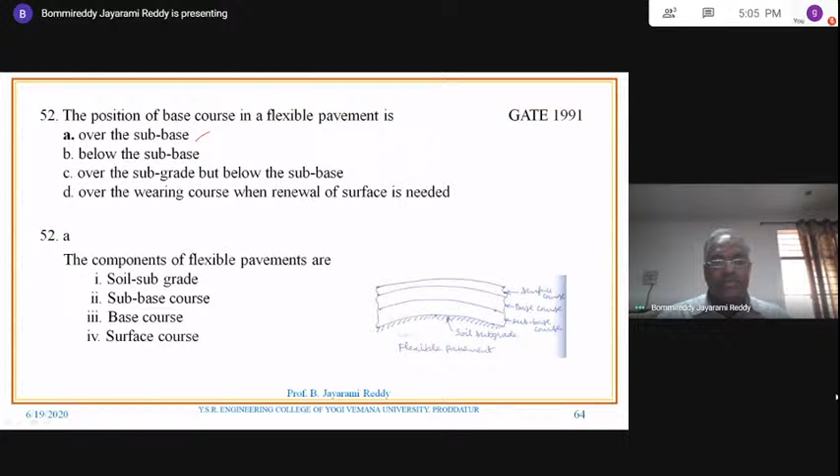So that's all about various questions appeared in GATE, and let us have a look at various previous Indian Engineering Services questions also, because those questions are also standard. Giving only few questions related to this, not covered in previous topics, and it may cover in future.

Consider the following data with respect to the design of flexible pavement: Design wheel load 4200, tire pressure 0.6 kg per cm square, elastic modulus 150 kg per cm square, permissible deflection 0.25 centimeter. And in the examination it also gives pi power half equal to 1.77, because calculators are not allowed for that exam, and pi power minus half, 1 by pi, pi square are also given, so that calculation is easy.

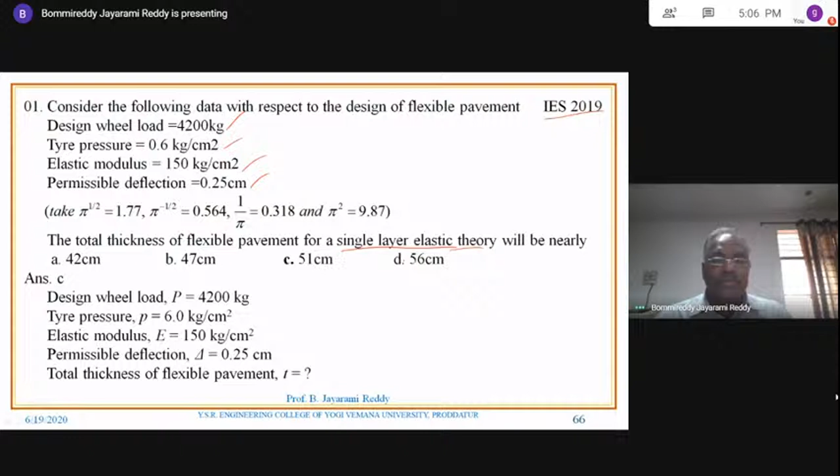The total thickness of pavement for a single layer elastic theory will be nearly - single layer elastic theory, nearly. So this is the entire data given, and this is the formula for the single layer theory.

Small a is not known, but P is known, modulus is known, delta is known. Substitute all the values here, and the thickness of the pavement comes directly to 51.3 centimeters. I already covered this formula earlier, but I told you don't remember it by heart. Sometimes questions may appear based on that, but GATE examination is not about by-hearted formulas. Anyway, if you are capable of remembering this, you can, otherwise neglect it.

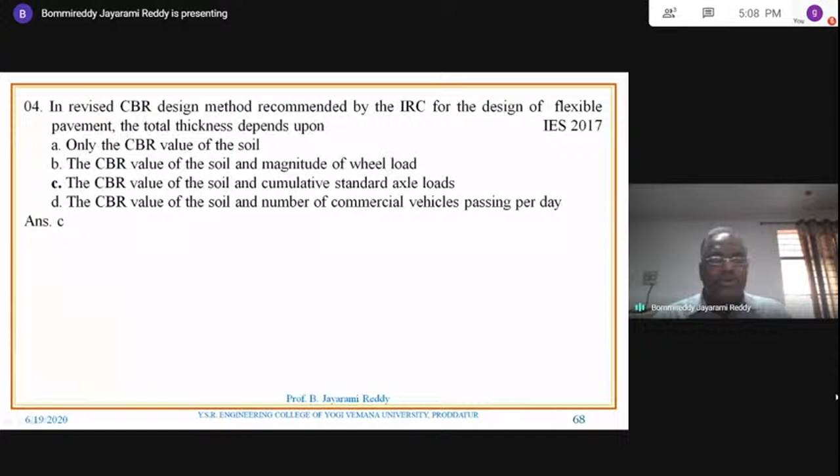The revised CBR design method recommended by IRC for design of flexible pavement - the total thickness depends on. So in the CBR method you have seen the total thickness depends on the CBR value and also NS.

In the previous problem we have seen for CBR equal to 5% and NS equal to 20, 30, 35, 40, and accordingly the thickness is given - 620, 670 and so on. So that means this is how the entire CBR method of design depends.

CBR method design depends on CBR equal to 5. Because if the CBR value is different, accordingly the thickness of the pavement also differs. So it depends on two parameters. One is CBR, then NS value, and these two parameters are used for computing the thickness of the pavement. So what is the answer? The CBR value of the soil and cumulative standard axle loads, NS. You already have some base knowledge from the numerical questions and theory, and based on that you need to analyze yourself for answering this type of question.

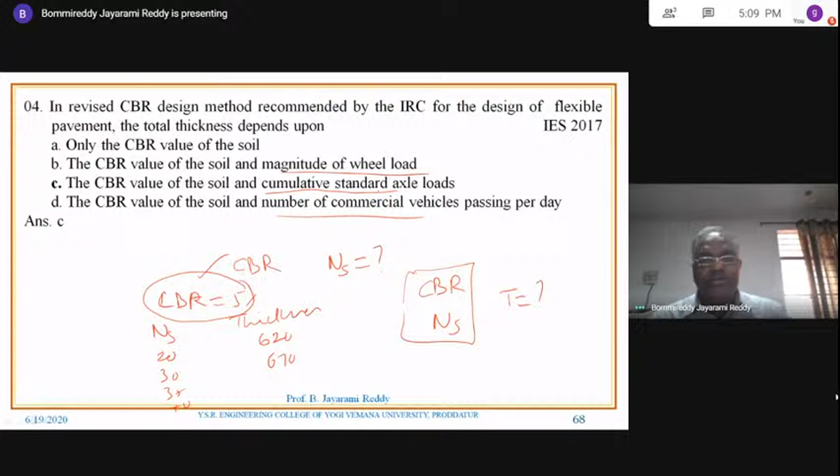Here you can look at only CBR value, so there is no question of determining the thickness. CBR value and magnitude of wheel load, that is not the case. Number of commercial vehicles passing is also not correct, since we are computing the standard cumulative axle loads.

So here you need to find out, by using Westergaard's corner load formula, the thickness of the pavement. This is the entire data given, and Westergaard's corner formula is this.

Already in the last class I told you this formula, but I said don't remember it. If such a question appears in the GATE examination, they will provide you this formula. Only thing you need to understand is how to substitute it and what are the various parameters. Don't memorize all these formulas, but whenever such a question occurs, you need to substitute appropriate values. That is more important here.

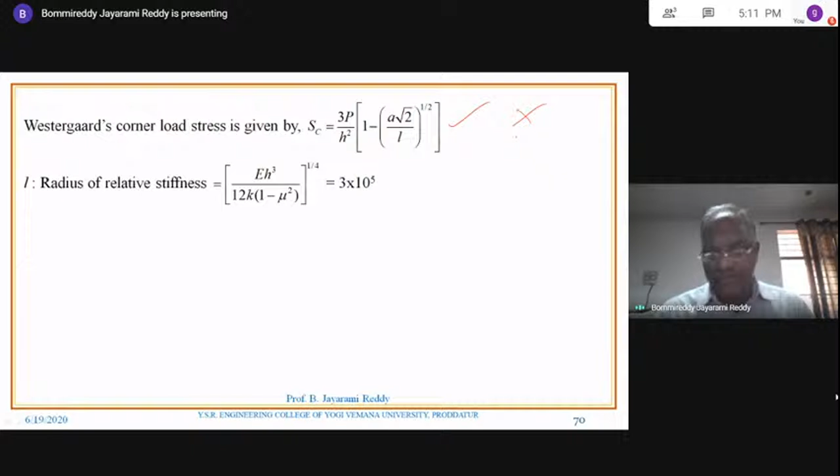The next one: what will be the initial traffic after construction, in commercial vehicles per day, for the following data? Annual average daily traffic at last count is 400 CVD. Last count means it is P. And after construction, the number of commercial vehicles is A, and that is the question. After construction, the value is the anticipated number of vehicles after completion, that is A. 400 is given as P, and rate is given as R.

Road proposed to be completed in 3 years, meaning the road is going to complete in 3 years. So you know the formula: A equal to P into (1 plus R) whole power N. It's just like that compound interest formula. That is, 400 into that, you will get 490 commercial vehicles a day.

In a flexible pavement, the vertical compressive stress decreases with the depth of the layer. Yeah, that is correct; as depth increases, the magnitude of the compressive stress reduces. Option B says the vertical compressive stress is maximum at the lowest layer — that is not correct, since tensile stresses get developed; in flexible pavement, no tensile stresses are induced at the surface the same way. Maximum stress induced by a given traffic load is said to be dependent on the location of the load on the pavement surface — but actually, the maximum stress induced depends on the location of the load on the pavement surface.

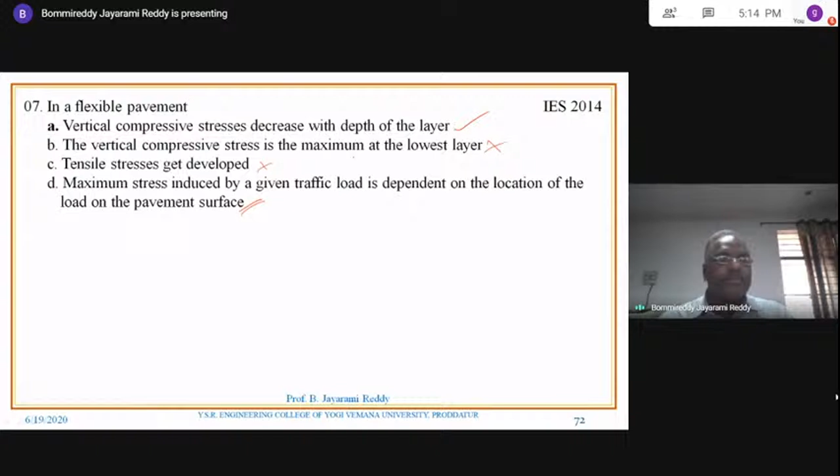Then, what is the deflection at the surface of a flexible pavement due to a wheel load of 40 kilonewtons and a tire pressure of 0.5 MPa? The value of E for pavement and subgrade is 20 MPa. What is the deflection at the surface of a flexible pavement? So delta is to be found.

In case of flexible pavement, you know this formula: 1.5 P into A by ES. So here, the value of E for both the pavement and the subgrade is 20, for both it is 20. Contact pressure, contact area A equals wheel load by tire pressure — both are given, so you will get the contact area. Once contact area is known, that is nothing but pi A square, where A is the radius of the contact area, and A will be given as 159.6. So what is it that you want?

PAES, delta - delta is the requirement. P is already given, 1.5 is constant, and A value is computed as 159, ES given as 20. F is a factor used for layered pavement, but here both layers have the same magnitude of modulus of elasticity, so it is 5.996 millimeters. Here, A value is not directly given. Instead, the axial load, wheel load, and tire pressure are given, and accordingly you can find the contact area. Based on the contact area, the radius of the contact area can be found, and substituting that you get the deflection of the surface of the flexible pavement.

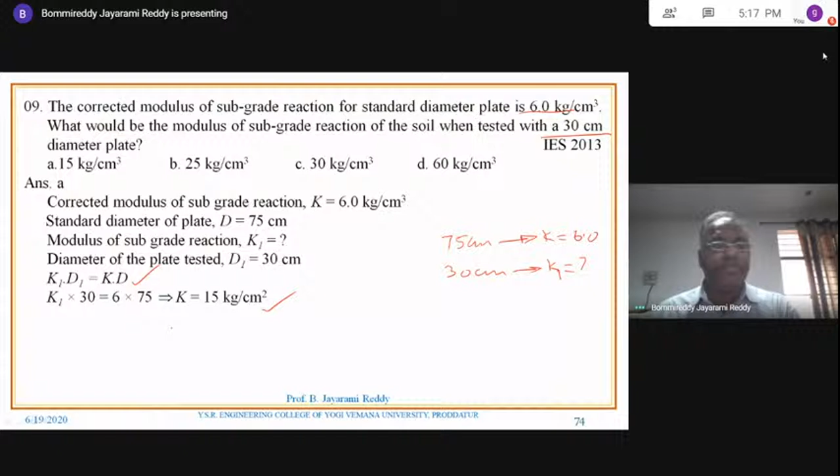Next - of course, this is in the next chapter that we'll take up later.

The subgrade soil properties of a sample are as follows: soil portion passing through 75 micron (0.075 mm) sieve is 50%, liquid limit is 40, plasticity index is 20. Find the group index.

You know this formula - you have to remember it, no other way. Group index equals 0.2A + 0.005AC + 0.01BD, and you should understand what A, B, and C are. A is the percentage of material passing through 75 microns.

A is the percentage passing through 75 microns in excess of 35. How much is passing? 50. So 50 minus 35 - that means above 35, that value is called A: percentage of material passing through 75 micron sieve in excess of 35. From that value, deduct 35, giving 15. What is the maximum value?

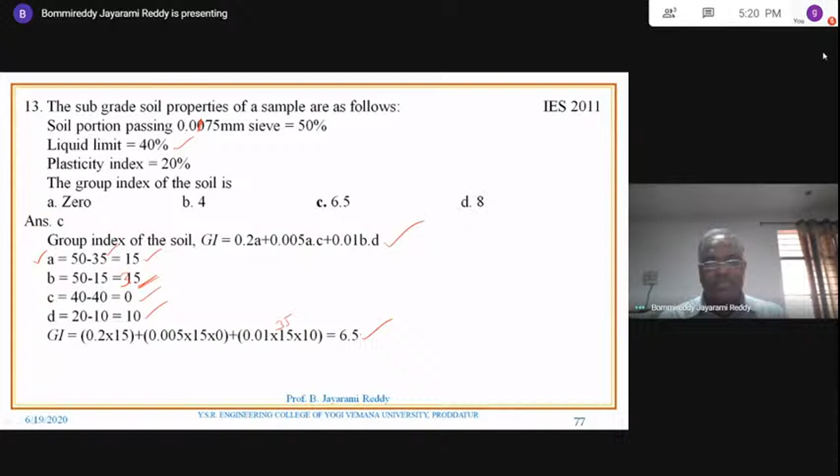The group index normally varies between 0 to 20.

In a concrete pavement during summer, at and soon after midday, the combined stresses at the interior of the slab is equal to - in summer, already you know the equation, already discussed several times.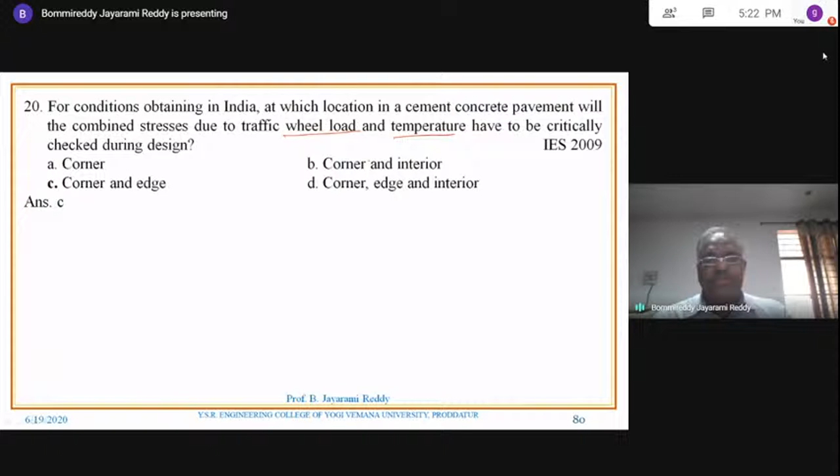For conditions obtaining in India, at which location in a cement concrete pavement will the combined stresses due to traffic wheel load and temperature have to be critically checked during design? Where do you check all this? It will normally be checked at the corner, edge, and interior. But the maximum critical cases for the Indian scenario occur at the corner and edge. In one numerical problem, you have seen only the corner stresses and various stresses at the edge. At the interior also it will come, and some worst critical cases occur there too, but majority of the conditions obtaining in India show these two prominent places where critical stresses occur.

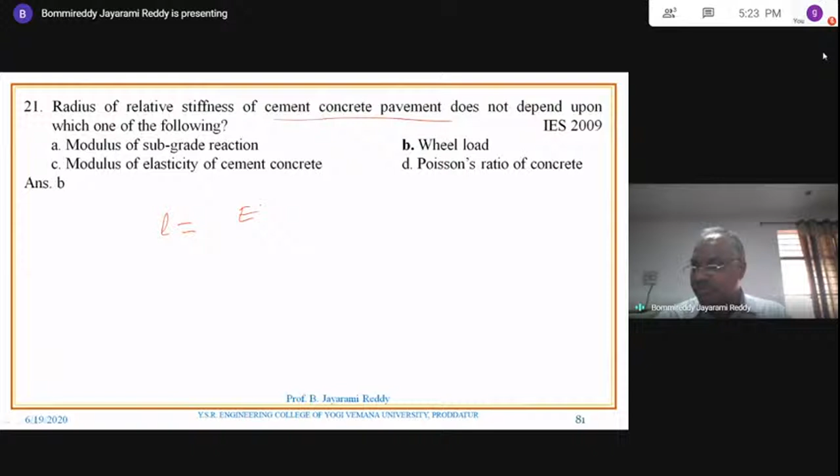Radius of relative stiffness of cement concrete pavement does not depend on which of the following? Radius of relative stiffness: L equals EH cubed by 12K into (1 minus mu square), whole to the power of 1 by 4. Is there any term for load? Modulus of subgrade reaction - it is there, so that answer is not correct. Then wheel load - is there any term wheel load? No, so that is the answer. Modulus of elasticity of cement concrete - that is also there, and Poisson's ratio is also there. So in this way you need to answer such questions; without knowing this formula, you may not answer exactly.

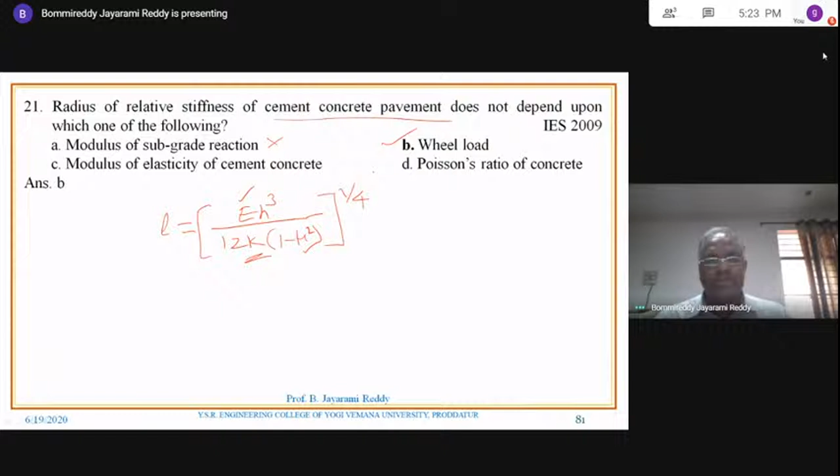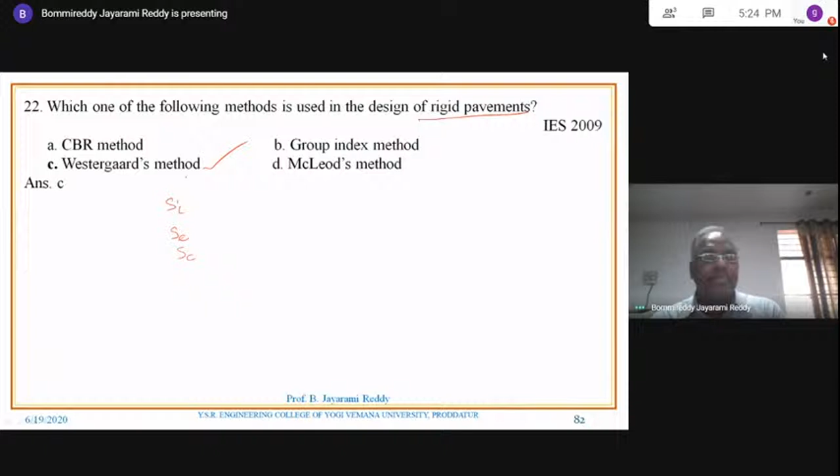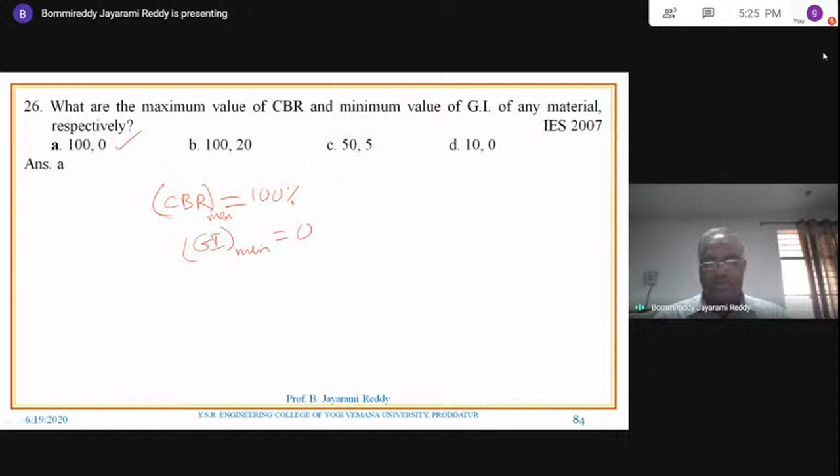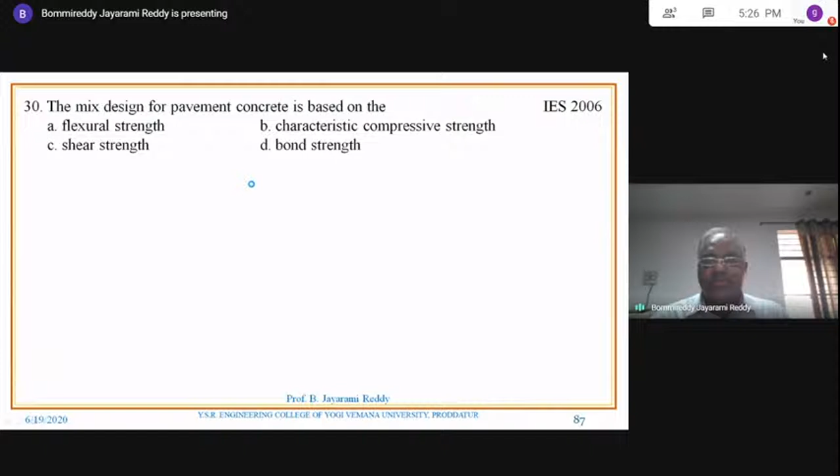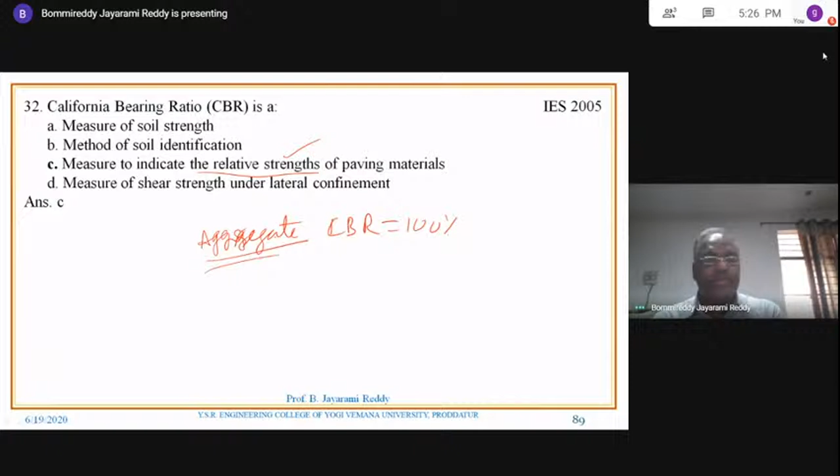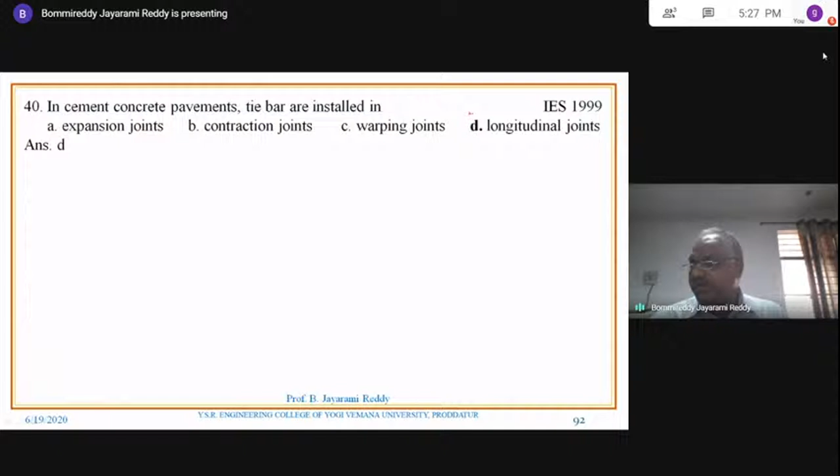If the load, warping and frictional stresses in a cement concrete slab are 210 (load stress), 290 (warping stress), and 10 (frictional stress), what is the critical combination of stresses during summer midday? Only one combination is asked: in summer, it is load stress plus warping stress minus frictional stress. You need not consider the other combinations. Simply 210 plus 290 minus 10, it becomes 490 Newton per mm square.

As per the latest IRC guidelines for designing flexible pavement by the CBR method, the load parameter required is the cumulative standard axles only, not the equivalent single axle load, not the number of commercial vehicles, not the number of vehicles of all types during the design life. We are computing the cumulative standard axles only.

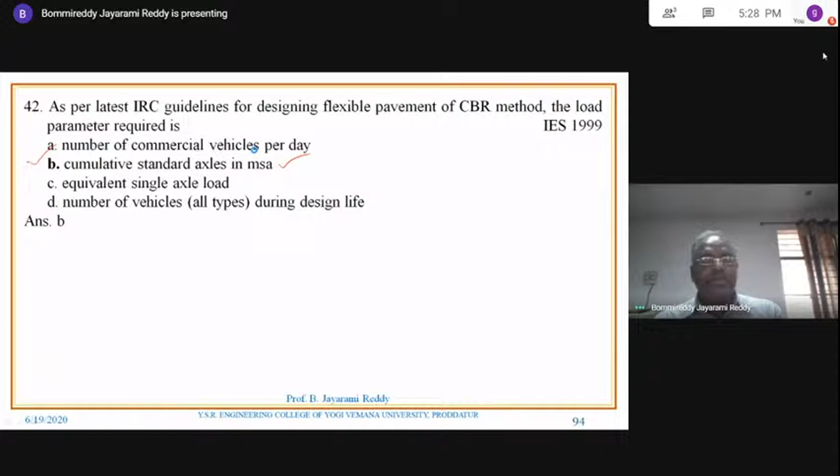The general requirement in construction of reinforced concrete road is to place a single layer of reinforcement. Normally CC pavements are provided without any reinforcement, but if a single layer of reinforcement is to be provided, it should be placed at the middle of the slab.

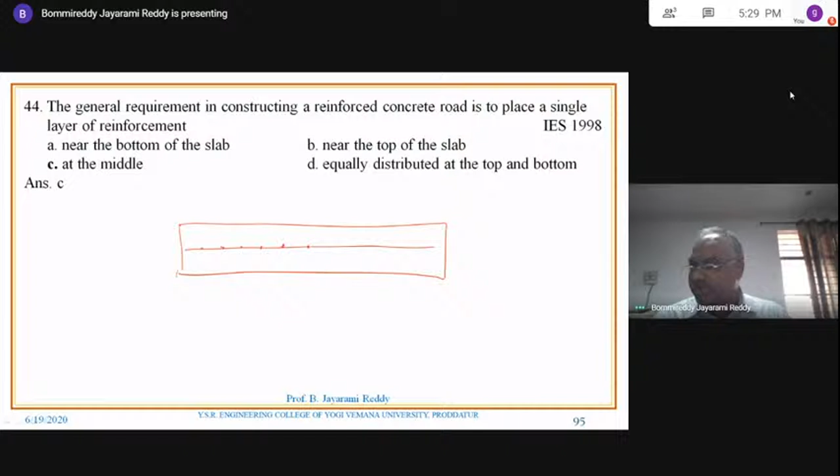For design purposes, thickness would be calculated with the static wheel load. By considering the impact effect also into account, the thickness of the slab will be increased—not the other options. Providing base course for the purpose of impact has no use. Adopting a reduced flexural strength of concrete through a factor of safety is not correct, nor is adopting increased stress relative to that produced by the static wheel load. So the only alternative is to increase the thickness to account for the impact effect.

The plasticity index of the fraction passing through 425 micron IS sieve, in case of sub-base or base course, should be less than 6. And of course, it's a routine question.

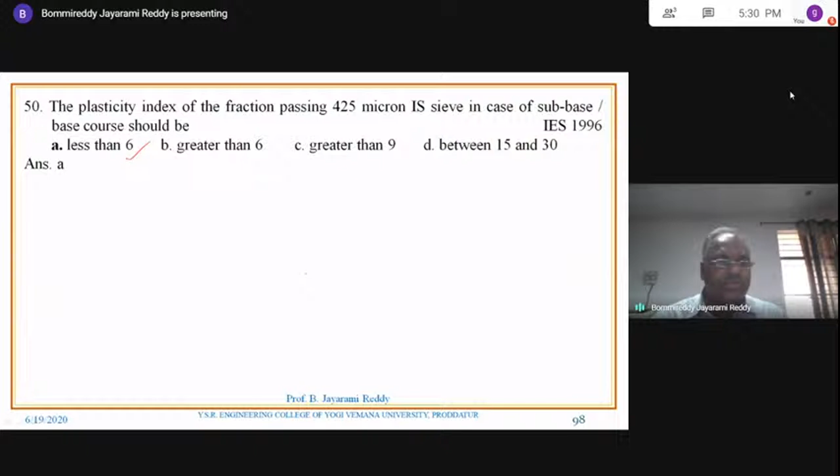These are various parameters given: R, E, K, etc. The combination of parameters required for obtaining the radius of relative stiffness of cement concrete is: E H cubed by 12 K into (1 minus mu squared), whole to the power 1 by 4. So E, H, K and mu are the parameters. But looking at option A, E, K, mu—V is not there, R is not there. R is not there here either. These are the various parameters associated with the radius of relative stiffness.

With this I think we can conclude today, since time is already over. With this, the entire flexible pavement requirement, analysis and design is completed, and in the next class tomorrow we'll switch over to pavement materials. So today, thank you very much for listening. Thank you.